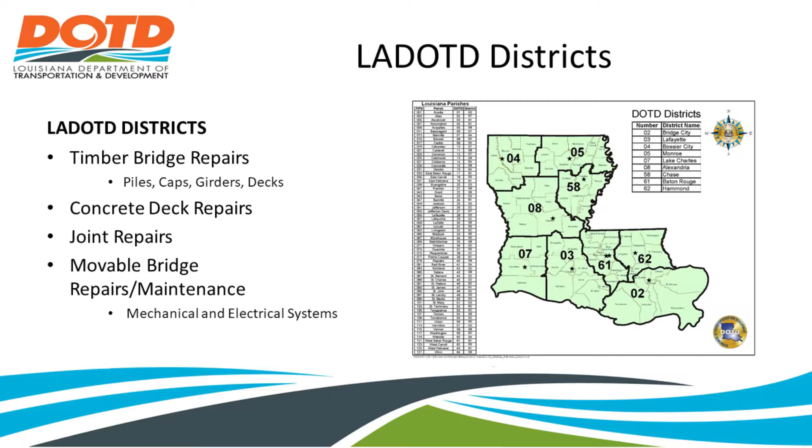All right, so Louisiana is divided into 9 districts, and each district does have a bridge maintenance crew, and they typically work with timber bridge repairs. We have a lot of timber bridges and a lot of timber pile bridges, so a lot of their repairs are timber piles. They also do deck repairs and joint repairs. And then if they have movable bridges in their district, which is usually the southern districts, they have mechanics and electricians that help keep those bridges opening and closing.

I am over a statewide crew that operates from headquarters, so that's my focus of the presentation. What we do from my crews is, number one, we replace bridges with concrete precast panel bridges. And we do end-on construction, and I have 2 crews that primarily only replace bridges. And the bridges we're replacing are ones that don't make it to their letting date. They either have to be closed and there's no more repairs that the districts can do, or they get posted so low and it's on a truck route.

As far as bridge repairs, we do helper bents, usually steel helper bents. We'll fix bearings or try to rehab bearings, retrofit a lot of steel members, either to help strengthen where there's section loss to keep a bridge from getting posted too low, or to maintain a posting. And then we have a water crew that does fender repairs, among other things at movable bridges that we'll get into.

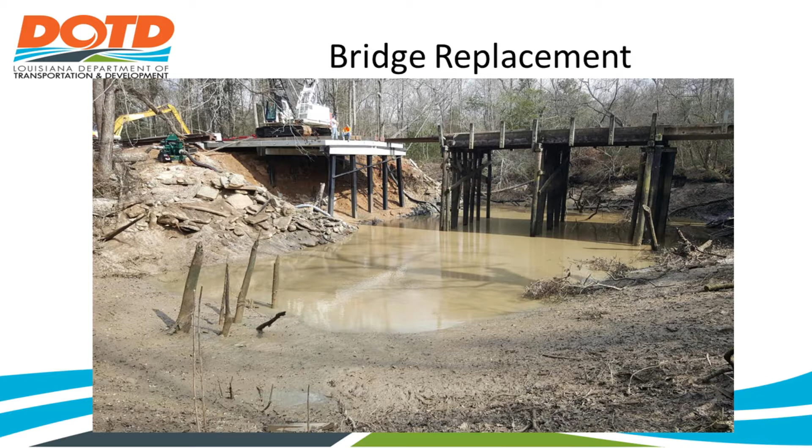So this is an example of our end-on construction, and you can see that is a lovely timber bridge. My only guess is Louisiana has a lot of lumber, has a lumber industry, and years ago they built a lot of state bridges using timber, and they decay pretty quickly once they start here because of the humidity and whatnot.

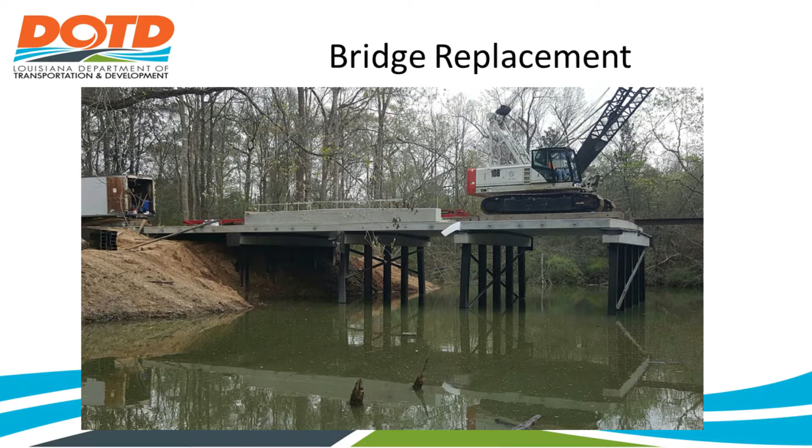This is what our typical bridge looks like. We do steel pile bents, concrete caps, concrete spans. And we pull out a span, build the first bent, and then come back and build the abutment, and then lay the first span, and then just move on that way. And we typically try to stick with straightaways and highways that can be closed. With the 2 crews working, a 4-span bridge will usually take us 6 weeks to replace.

So this is a longer span bridge that we had to do after the 2016 floods that we had in our state. As you can see, we do battered piles when we need to. Depends on how high the bridge is.

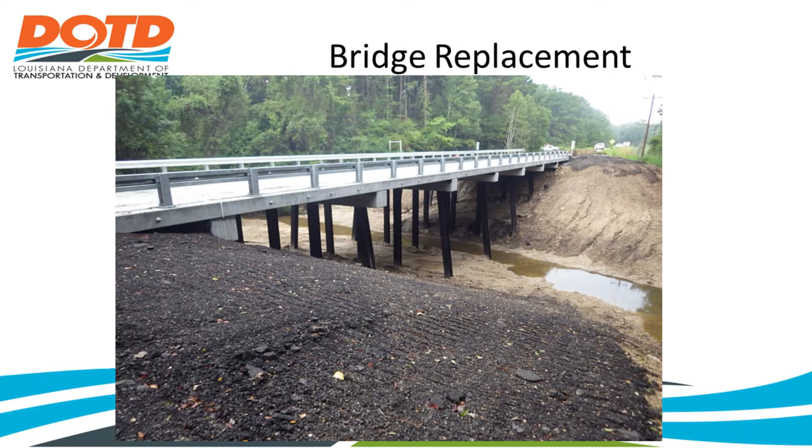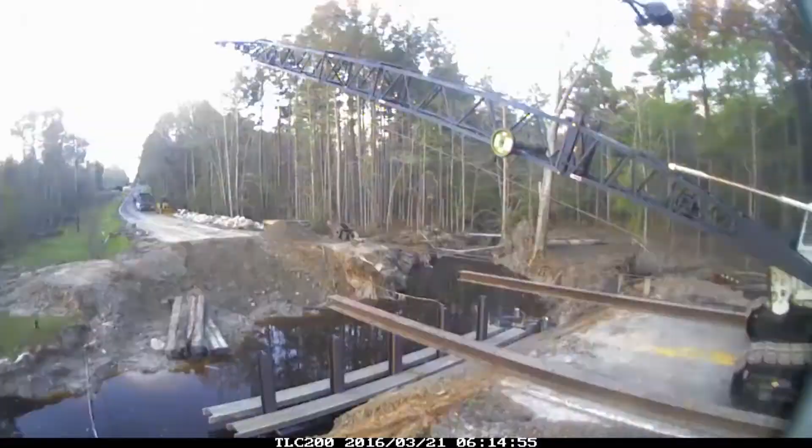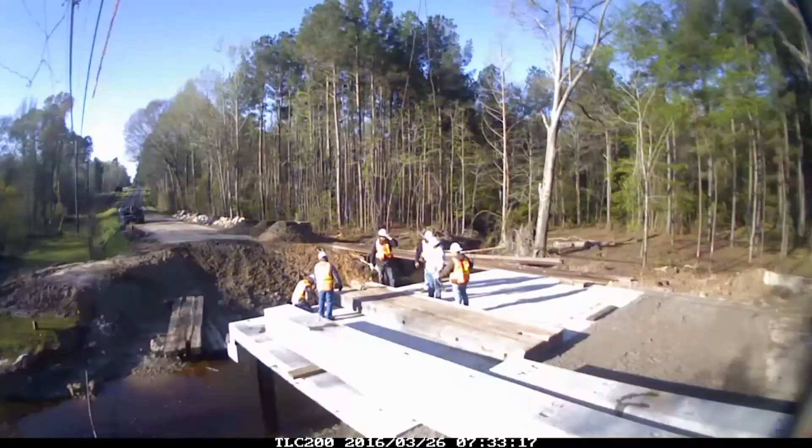All right, so bear with me on this video. We had to buy new cameras, and we didn't know how to take out the night scenes. So once I get my new cameras, we'll have an updated video. But this is our time lapse of a bridge replacement. This was a single span bridge that got washed out in North Louisiana in 2016. And I think they got it replaced in a matter of 2 to 3 weeks. It was just a 2-span bridge that we went back with, or 3-span, I can't remember.

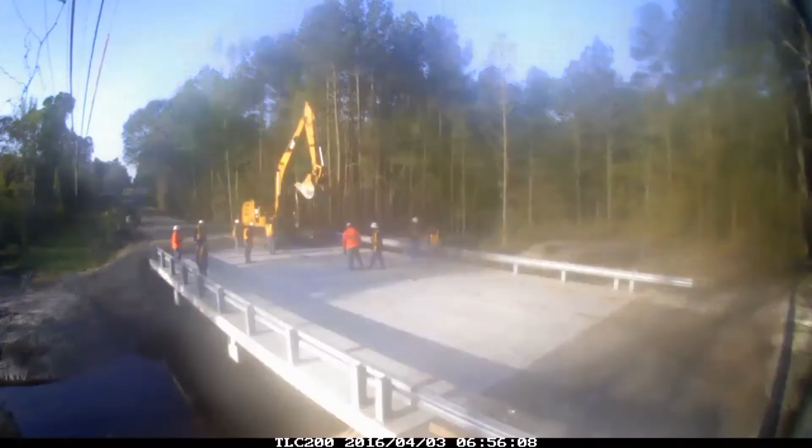And so in-house, we have cranes and excavators and hauling trucks and all the material equipment that we need in order to replace these bridges. And so typically we're replacing bridges on highways with lower ADTs, or highways that trucks use, lumber mainly. Sometimes we do have to go do emergency replacements, and then bridge design will come back, and like NHS bridges, they'll come back later on and replace it to make sure it meets the criteria required on a national highway system bridge.

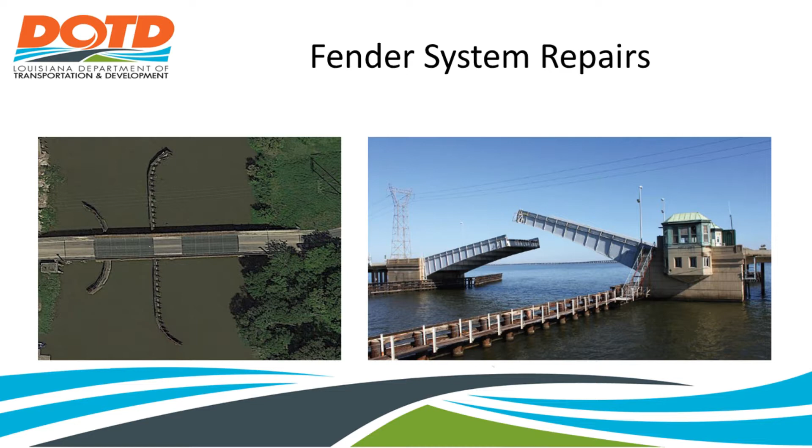So moving on to our water crew, we have lots of movable bridges. I think Louisiana has the most in the country. And our movable bridges have fender systems. Well, you can see the fender system, that overhead, that's where the boats are supposed to go, between those 2 fender systems. They don't always do that, but we'll get to that. So this is our equipment; we have a tug.

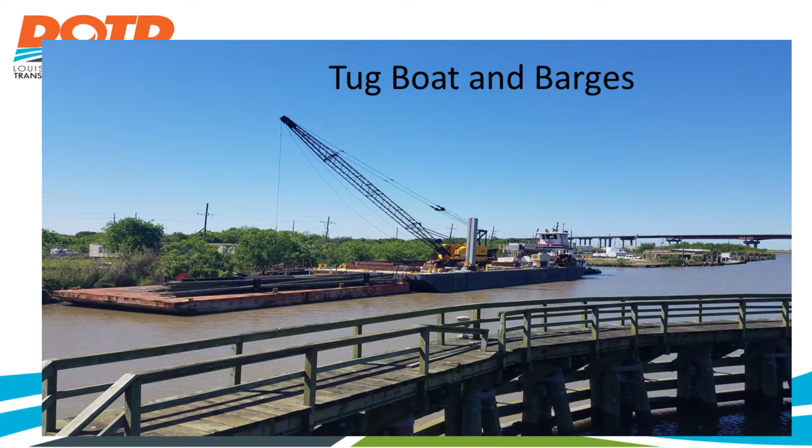It's in the back, you can see. And then we have an equipment barge, which our crane sits on, and other equipment and material. And then the one sitting in front is our material barge.

And we just move all over the state, going to bridges, mainly in navigable waterways that have fender systems that get hit. And then while we're there, we'll do whatever the district may need help with to make repairs, do preventative maintenance, whatever they need help with.

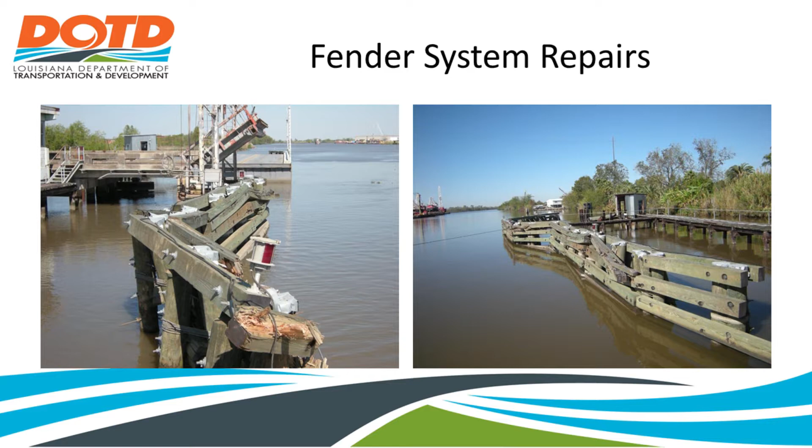So this is a damaged fender system. This happens a lot. As you can see, it helps protect the bridge. At least they're hitting that, not the bridge, but your nav lights are on it, so you usually have to get them fixed so you can fix your navigational light system.

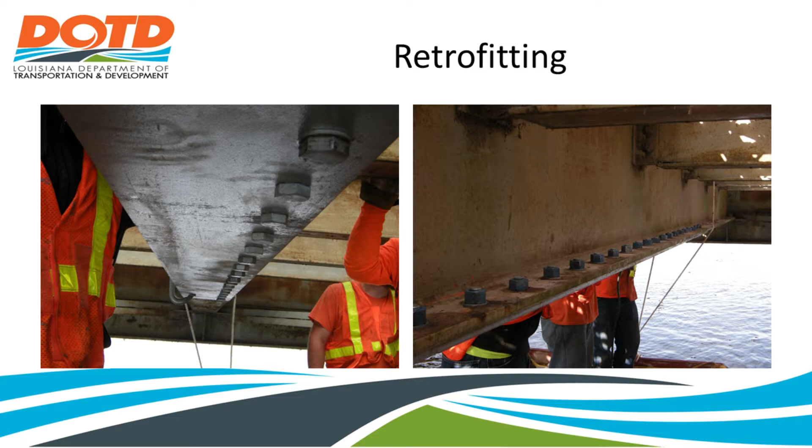This is some retrofitting we've done. It's just to give you an idea of what we can do. A lot of movable bridges on water end up needing to be beefed up. There's a lot of corrosion when you're that close to the water.

So we go in and add plates to help strengthen the bridge after it's corroded until it can be rehabilitated through bridge design. And it's just another example of what we do. Add plate, bolt it. This was a good project.

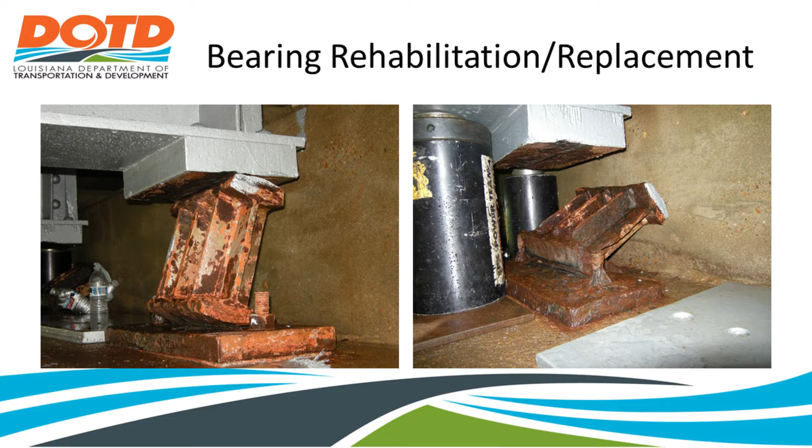I think this one was in North Louisiana, and these old rocker bearings, completely corroded. You can see that one is pretty bad off once we jacked up the bridge and it fell out. On the left over here, the rocker bearing was beyond rehabilitating.

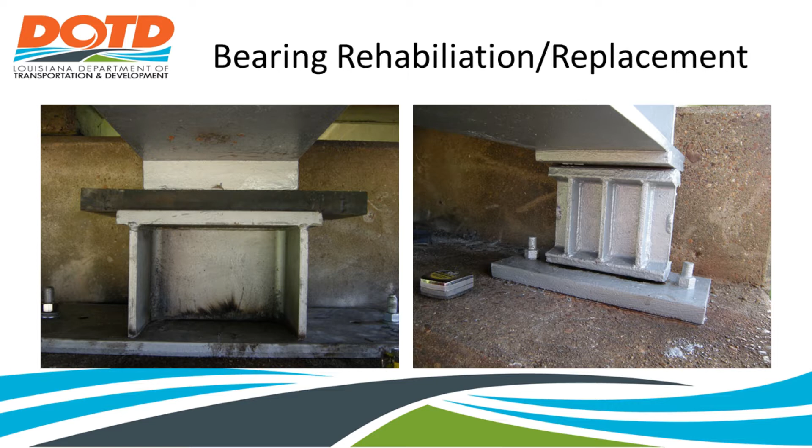So we used some of our H-pile cut off, turned it over, welded a plate to it, coated it, painted it, and put a neoprene pad on top. And then on the other picture is a rehabilitated rocker that we blasted and painted and reinstalled.

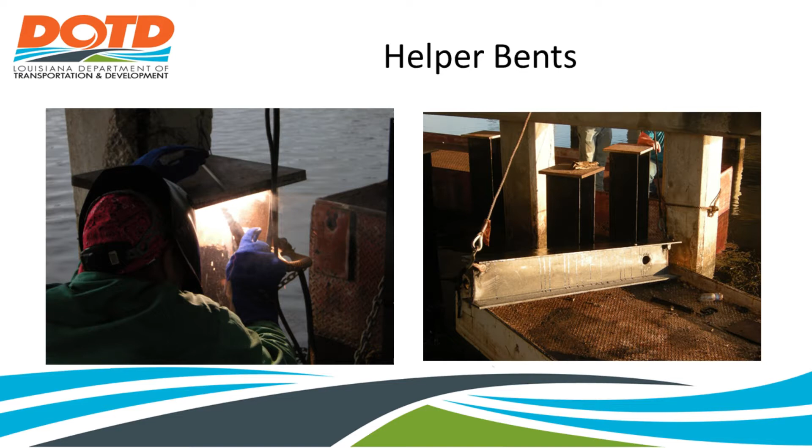Helper bents. This bridge was literally sinking. It's over Salt Bayou, and to get it to its letting date, we had to go install some helper bents. So we cut holes, drive the piles, weld plates, install steel caps. That's the after, form everything up, coat everything.

We paint our bridge piles. We do a zinc, and then we coat it with coal tar epoxy. And when we're working South Louisiana, we'll do like 3 coats of the coal tar, what it looks like afterwards.

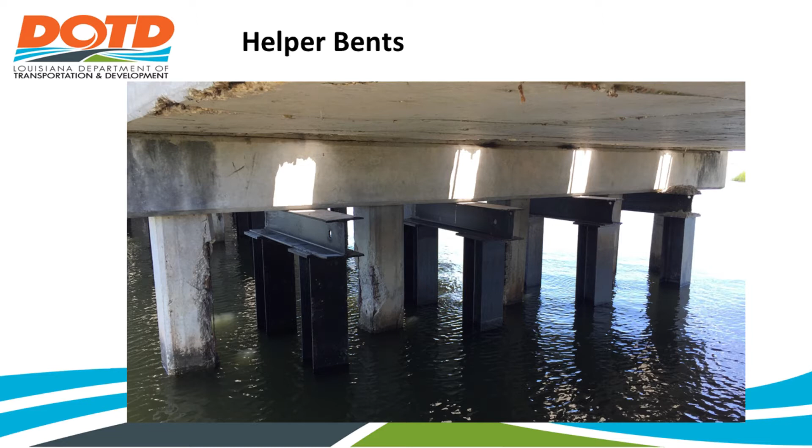And that's a pretty typical repair for timber bridges, concrete bridges, any bridge where we're having problems with caps or piles. My crew would just rather go in and drive some helper bents. But they'd actually just like to replace the bridge. That's easier, but it's not always feasible. So if you have any questions, I'd be glad to answer them.

On your piles, how are you establishing pile capacity, and what type of hammer are you using? And it looks like you're driving all steel. Why aren't you driving something either concrete or steel shell piles?

So concrete. So like in South Louisiana, we end up having to drive 160, 170 feet a pile because it's literally like peanut butter. And a lot of our projects are emergency based. And so concrete is not feasible because you have to have a designed pile length and have them precast in advance.

We do steel, that's what we have the equipment to handle, and our geotech section will give us a length to aim for and come to a restrike after we've driven and let it set up. So that's usually how we establish our length and pile to get capacity. And the geotech section doesn't recommend that we go concrete. They're like, no, stick with that.

Do you have standard designs for those bridges that you're replacing? We do. One of our bridge engineers in bridge design designed them a few years ago. Carl, raise your hand. He's going to keep them up to date, or somebody in bridge design when they change their design criteria.